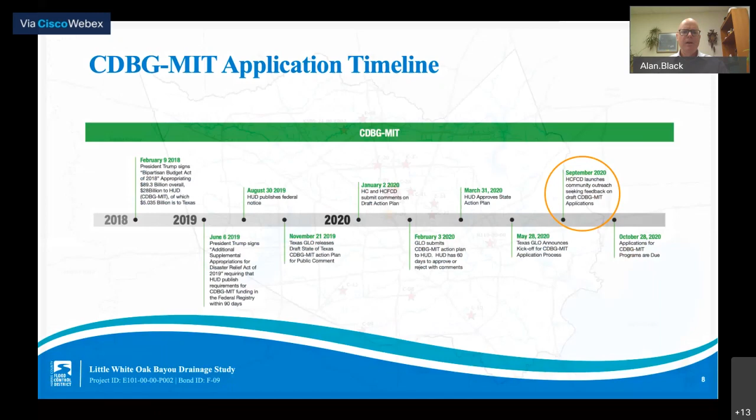For those of you following along with the PDF via phone, we're moving to slide 11 of tonight's presentation.

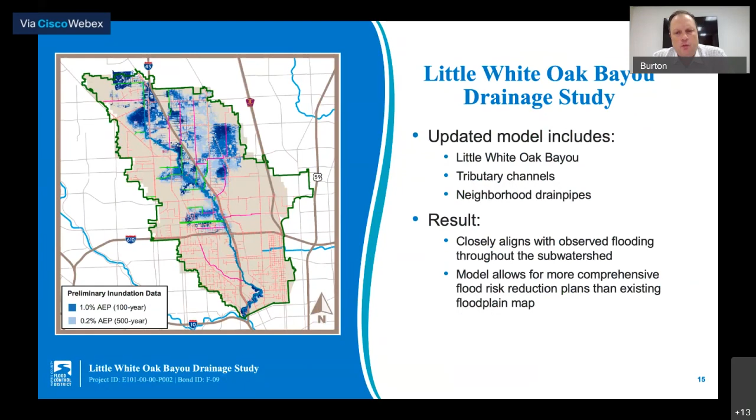So we built a new model which includes both. When we put these features into our modeling, we get a better overall picture of flooding throughout the subwatershed that most closely aligns with observed flooding in areas away from the bayou itself. I must add that the model we're depicting here is a work in progress and not finalized, so we have it labeled as preliminary. The model also allows us to develop more comprehensive flood risk reduction plans that benefit the entire subwatershed, including those lateral areas away from the bayou.

Where are we in the development of this master plan? We expect to have this master plan completed in early 2021, and we'll have additional public engagements to talk specifically about this plan.

The master plan will outline multiple projects the flood control district and others can undertake to address flooding throughout the watershed. This will necessarily include coordination with other jurisdictions, such as the City of Houston, to fully implement. Overall, we estimate it would cost several hundred million dollars or more to implement the master plan. However, the Harris County Flood Control District 2018 bond only allocated $30 million for projects in the Little White Oak Bayou subwatershed. So where will the remaining funds come from? The Flood Control District looks for partnership opportunities with various entities to help fund individual projects, and typically this happens after we complete a master plan similar to the one I have introduced to you here.

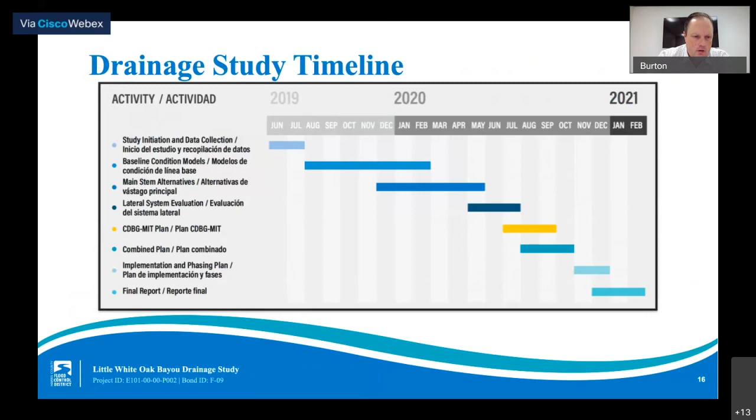Now I'm going to get into the second part of the conversation, and this is really what we're here to talk about today. For those of you following along with the PDF via phone, we're moving to slide 17 of tonight's presentation.

Burton, our next question is going to come to you, and it's from Mr. Branch. He asks if anything is going to be done immediately to help Independence Heights on flooding issues. I think the word in there is immediately.

So let me answer this way. We're very aware of the issues of Independence Heights. When you talk about flooding on Little White Oak Bayou, there are a couple of places you think of first, and Independence Heights is certainly one of those. When it comes to the CDBG-MIT grant application that we're talking about today, there will be detention in part of the project upstream that will provide some benefit in Independence Heights, but not a whole lot. The real benefit in Independence Heights will come with the removal of the culvert underneath 610, which is really the beginning of the problem in that area. Our understanding and our coordination with TxDOT is that as part of their project, they intend to remove that culvert and replace it with a bridge. And that will go a long way toward reducing flooding between the loop and Crosstimbers, which is Independence Heights. And it's difficult to do a whole lot there until that happens.

So connecting to the word immediately, we start to look at what TxDOT's schedule would be if their project goes forward. And that's the timeline on that.

Emily, I'd like to add a little bit to that if I could. Absolutely. So there was one point I actually missed when I was responding to Brian G's comment earlier. He mentioned that he is near the Riggs Road.

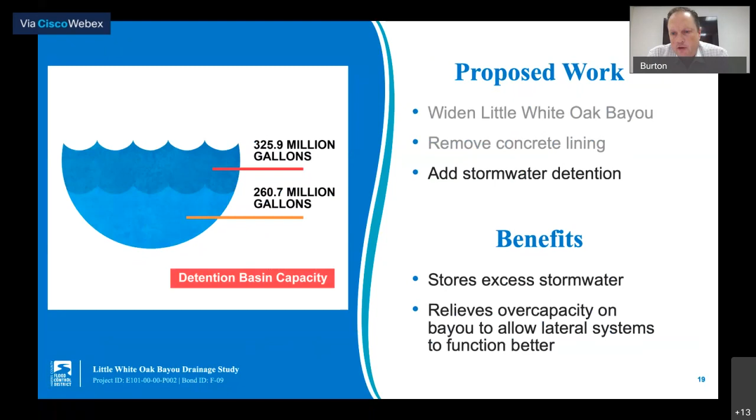I've never thought of it in those terms exactly, but in essence, that is what we'd be doing through particular REACH projects, where we would be constructing a channel that would look and perform quite a bit different than the one we see today. Instead of concrete, you'd see grass. Instead of steep slopes, you'd see gradual slopes. Instead of something that you probably want to hide and not look at, you might have something that you'd like to look at and enjoy. So I've never thought of it as rebuilding the bayou per se, but that's probably what it is in that particular REACH.

Dina, I'm going to come to you for our next question, which is from Ken G, and I think it's a really good one. Without the concrete lining, what will keep the newly developed bayou from major erosion problems?

Well, actually, Burton just touched on some of that. When we go in and design the channel to be constructed, we'll gather a lot of information about the soil properties, about the flows that will be carried by the channel, and then come up with a design that will help carry those flows, but also protect it so that it doesn't have erosion once it's been constructed. A lot of times that can be the types of plants you put along the embankment. Burton mentioned we often will use a grass-lined channel with a more gentle side slope instead of a very steep embankment. But we also can put different types of plantings in along the channel as well, things that will really help protect it and let it hold up as it's carrying those flows down through the channel.

Thanks, Dina, that's a great answer. Our next question is going to come to Alan, and it really gets to the heart of why we're here tonight. Mrs. DeBose is asking what the difference is between specific flood mitigation funds and these CDBG-MIT funds. Alan, can you speak to that?

Sure, another really good question. I'll start by illustrating the bond funds. Harris County voters approved bond funds for these projects. So in the Little White Oak Bayou watershed, that means flood control has $30 million to spend. Now, Burton has also talked about a much bigger need in that watershed that goes well beyond $30 million. So on the first part, the flood mitigation funds, those are the bond funds that have been approved by voters, and we are anticipating spending those in the Little White Oak Bayou.

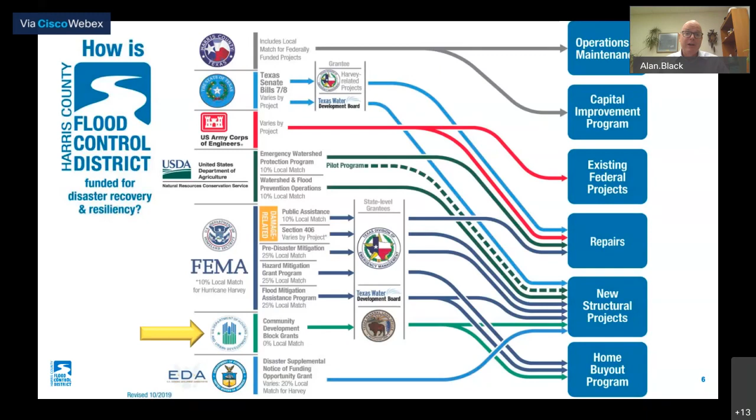Those CDBG funds are, I use an expression, other people's money. It's a way to plus up the money we've already committed. We've put our local skin in the game, we're putting our local money on the table and saying we're ready to spend this. Federal government, we'd like you to spend some money as well because we all pay our federal taxes. So that's kind of the difference: the local flood mitigation funds are the funds that come from your property taxes and were approved through the bond election, but the CDBG funds are coming from the federal government. I hope that helps.

Okay, Burton, I'm going to send our next question to you, and it is from Peter. He's asking if this project is in any way affected by the North Houston Highway Improvement Project.

So the CDBG-MIT project that we're talking about today is absolutely independent of the North Houston Highway Improvement Project. It's a standalone project. We would be sitting here with you tonight, even if TxDOT was not doing a project. With respect to the larger Subwatershed master plan for all of Little White Oak Bayou, we have coordinated quite a bit with TxDOT just so we understand each other. I use the term we're playing in the same sandbox, so we've got to figure out how to play together. And there are some things that interact between TxDOT and the flood control plan, but the CDBG-MIT project is 100% independent of the TxDOT plan.

Thank you, Burton. Alan, our next question is going to come to you, and it's from a Mrs. Wilson. She's asking if any projects on Buffalo will be affected.

It's hard to interpret what you mean by affected. First, in regards to funding, the answer would be no, because the 30 million, for example, that I mentioned a minute ago, is specific to the Little White Oak Bayou watershed project. So funds will not be moved from one bond project to another. Where we say in the bond table that 30 million is good for Little White Oak, then it's going to stay with Little White Oak.

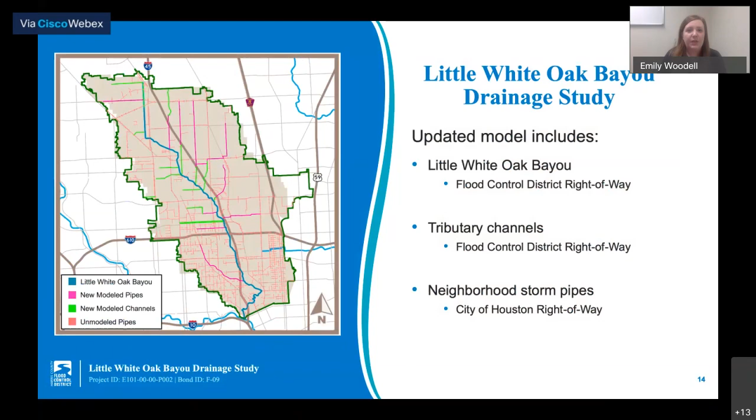Thanks, Burton. It's always interesting to hear the background of what goes into these decisions. While we're talking about the project we're honing in on tonight, the specific one that will be included in the CDBG-MIT grant application, Burton, can you help us by clarifying the benefit area, the proposed benefit area? Lashendra is just asking for a little bit of clarification there.

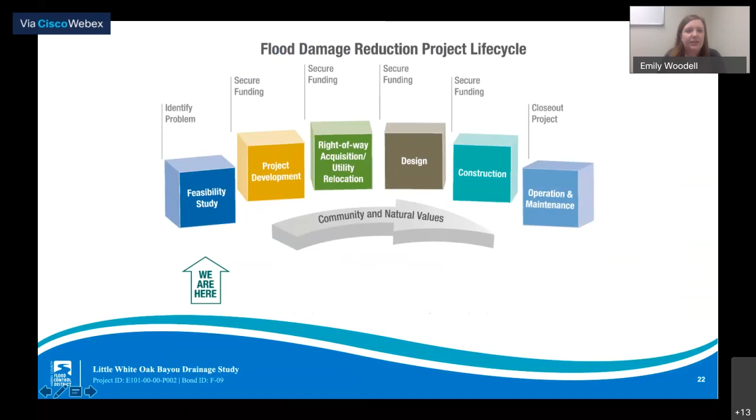Sure. We chose this part of the channel for a couple of reasons. One is this is a part of the watershed that's experienced quite a bit of flooding in the past, so certainly we'd like to address that. In addition to the severe flooding that's been experienced, flood control also owns quite a bit of right-of-way through this area, and we'd like to maximize the use of that.

Perfect. All right. Burton, our next question is going to come to you. A resident is commenting who is concerned about the 500 block of Tabor. It sounds like flooding is lateral and the storm drains cease to drain the street and houses flood. They suspect that the undercapacity of Little White Oak Bayou causes flooding. Can you speak to whether this project will aid in helping remediate some of that flooding?

If I'm not mistaken, I believe Tabor is further downstream near Main Street. I described reach 1, 2, 3, and 4. It would be in reach 1, and that's quite a bit downstream of the CDBG-MIT project that we're talking about, which is really in the upper part of reach 2 and the lower part of reach 3. So there would be small benefits, if any benefits at all, down there, to be frank. And so this project would not manifest that far downstream.

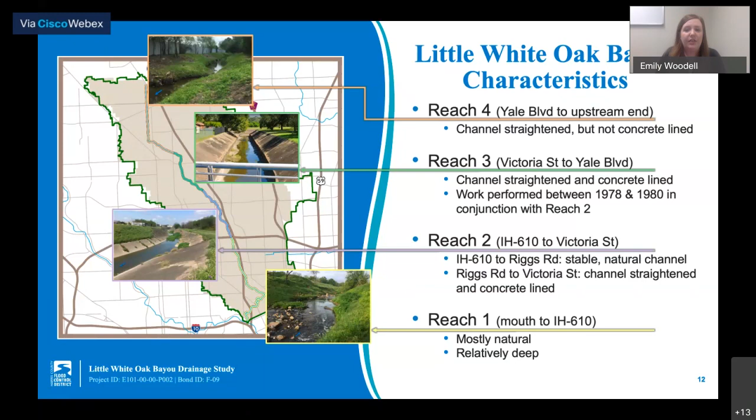Okay. And Burton, I'm going to stay with you for our next question. The mayor has requested that TxDOT alter their proposed project. Would that or any other alterations affect this proposed project?

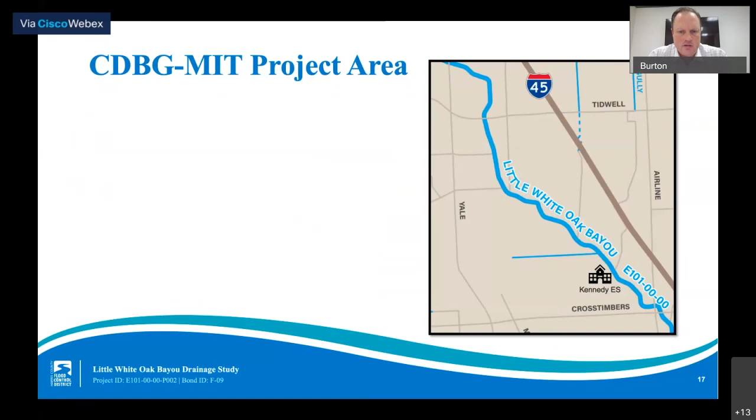Yes, we're aware that the mayor has requested that TxDOT minimize or avoid a larger footprint. That would require some changes to things like lane width, but it would not result in any changes to the larger drainage features we're coordinating on. So even if their project changes in terms of lane width and right-of-way footprint, they would still remove the culvert at 610 and replace it with the bridge. So in that context, no, it doesn't affect us. As we're talking about the CDBG-MIT project here today, we are absolutely independent of TxDOT, and it doesn't affect us at all.

Is there a chance of partial funding? That's a good question, I actually don't know the answer to that—that would have to come from the General Land Office. But I'll speculate: let's say, for the sake of argument, they said, hey flood control, we don't have $68 million, but we do have $30 million. Well, of course we're going to say we'll take it. But that also means we'll have to re-envision this particular project, because there's a balance between channel improvements and detention that has to be built to mitigate those improvements. So what it'll result in is a potential scaling down of both the channel improvements and the detention basin to match the dollar amount provided.

For our last question of the evening, the same caller asked if any other agencies are competing for these same funds. I'd like to broaden that and have you talk about the process and competition we're facing, and the importance of community engagement along the way. The short answer is yes, there are definitely other agencies competing for the same funds. When the federal government offers the state of Texas $4 billion and the GLO is responsible for rolling that money out through competitive applications, you can bet a bunch of people statewide are going to submit applications, and there's only so much money they'll have.

I know $4 billion sounds like a lot, but they will likely receive more applications than they have funding for. We're hopeful and feel confident that with good community support and a well-written application, we'll stand a good chance, because one of the things we continually remind the GLO and HUD about is that these funds would not exist were it not for those directly impacted by Hurricane Harvey. If Harvey hadn't dropped 35 inches on average across the county and caused 150,000 people to flood, the $4 billion would not have likely come to Texas. Were it not for our damages, the money would not exist. So we continue to shout from the mountaintop that this money needs to be spent here to help make this community more resilient.